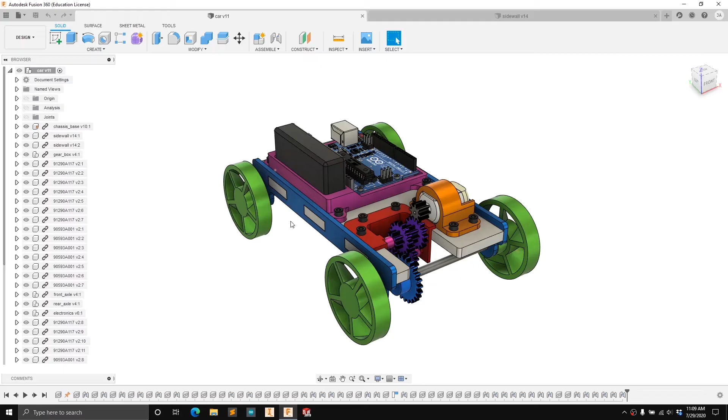In the last video, you should have set up your car project and imported all of the additional components. In this video, we're going to make the first of the components necessary for this assignment, which is the sidewall part. The sidewall is a laser cut component made out of 1/8 inch acrylic. The purpose of the part is to hold on the front and rear axle onto the chassis base. That is done using a friction fit between the tabs on the chassis, which fit into the holes on the sidewall.

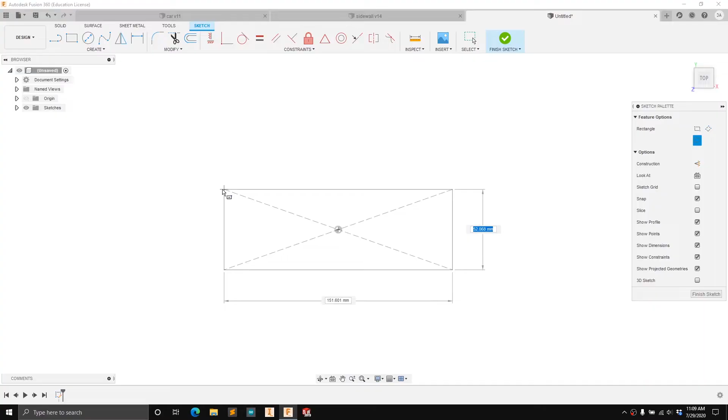To start, go ahead and click New Design to open up a new window. Then with all our parts, we're going to start with a sketch. We're going to put the sketch on the top plane, and we're going to start with the center rectangle. To do that, hit Create, Rectangle, Center Rectangle. Left click once on the origin, drag out, click again to finish the rectangle.

Then we're going to dimension it using the dimension tool to be 14.6 millimeters tall by 160 millimeters long. Zoom in a little bit there.

Okay, now we're going to create the holes for the axles. These holes are going to be 5.4 millimeters in diameter, and that just gives a little bit of clearance because our axles are 5 millimeters in diameter. So 5.4 millimeters.

Instead of putting that dimension on both of these circles, we're going to use what's known as the equal constraint. The equal constraint basically makes sure that these two circles will always stay the same size. Click once on the dimensioned circle and then click again on the other one, and you can see this equal sign shows up. Now if I change this to be maybe 8 millimeters, both of them change. So we're going to change this back to 5.4 millimeters.

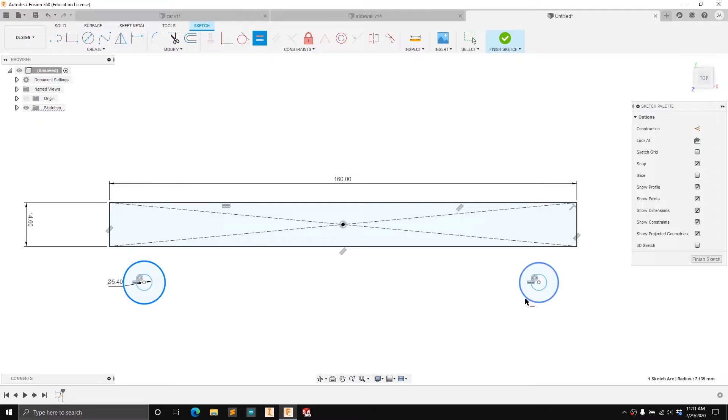Then we're going to draw another concentric circle around both of these parts, and we're going to put another equal constraint on these. Then we're going to dimension from the inner circle to the outer circle to be 5 millimeters, so that gives us a little bit of wall thickness there that we want.

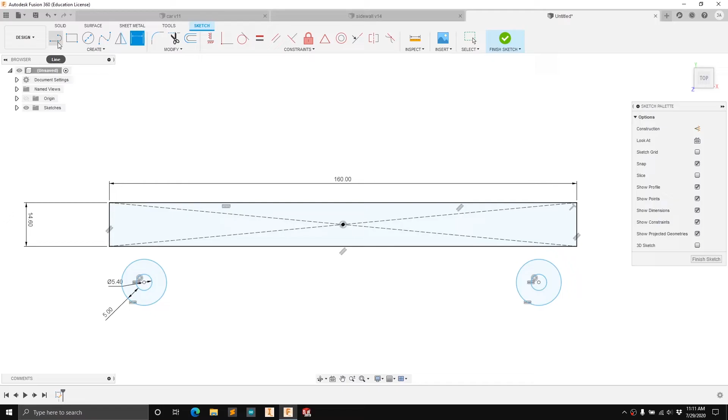Now we need to connect these outer circles to our main rectangle. We're going to do that with some vertical lines, so use the line tool here. Zoom in a little bit and make sure you see this X; that X means that you're on the outer circle. Then drag up and make sure you see this little box here, and that means that it's at a right angle, or that it's going to be perpendicular to the rectangle, which is what we want. So we want 2 of those. Doesn't matter where on the circle right now, we're going to fix that later. So you want 2 vertical lines like that.

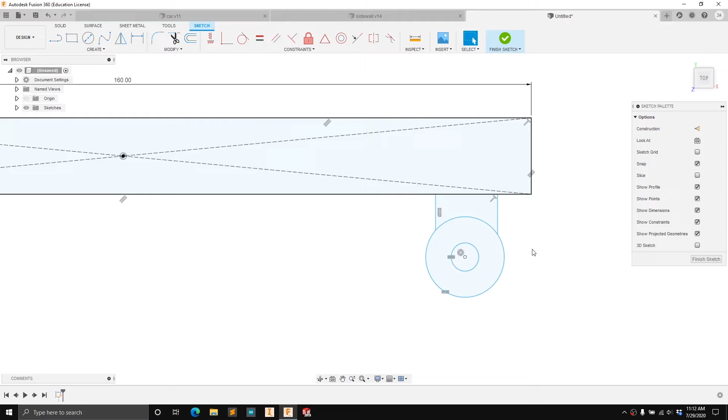If you didn't happen to make them vertical, that's okay. You just need them to be connected, and you could add a vertical constraint here like that, and that'll fix it. So there's a horizontal vertical constraint; it takes whatever it's closest to and makes it either horizontal or vertical. Same thing here, one more line. Now we want to make these lines tangent to our circles, so we're going to do that with the tangent constraint, which is right here. Click once on the line and once on the circle that it needs to be tangent to. Do that with all 4 of these lines.

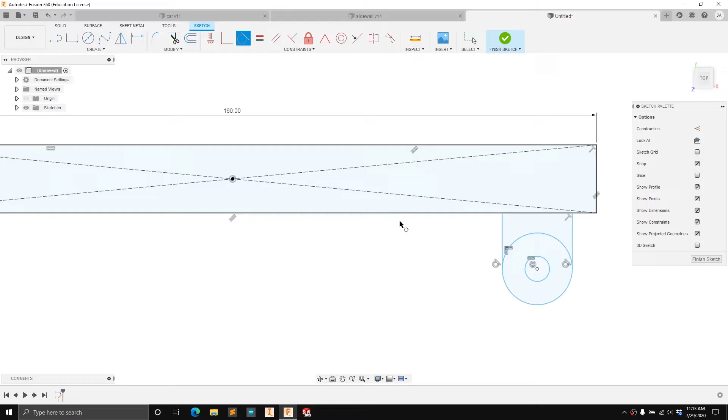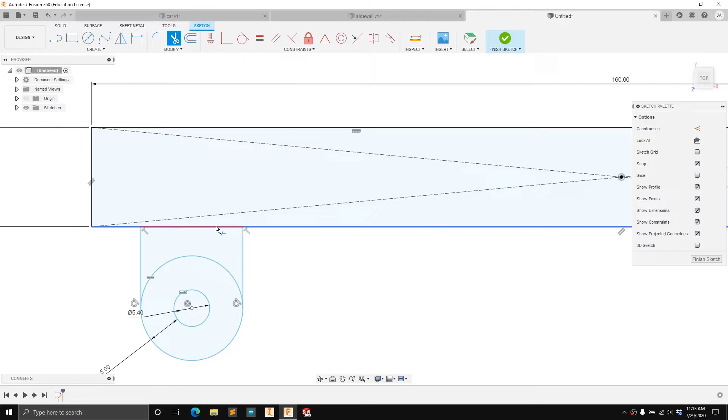So the last thing, or second to last thing we need to do is get rid of some of these extra lines. You can see here we don't have one clean profile; we've got kind of 5 different profiles that we don't need. To fix that, we're going to trim some of these lines using the little scissors tool here, known as trim. So you can remove that line and this line on both of these little cutouts.

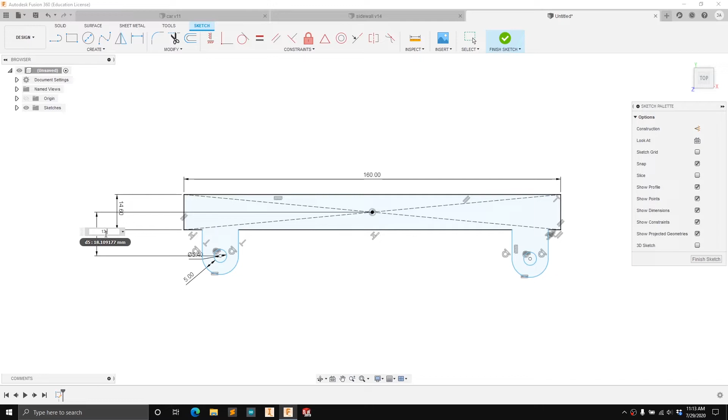Okay, so now we just need to dimension where these circles are. To do that, we're going to hit the dimension tool again, and dimension the center of this circle to be 13.825 millimeters down from the center of the rectangle. Then we're going to dimension the center of the circle from the left edge to be 14.5 millimeters.

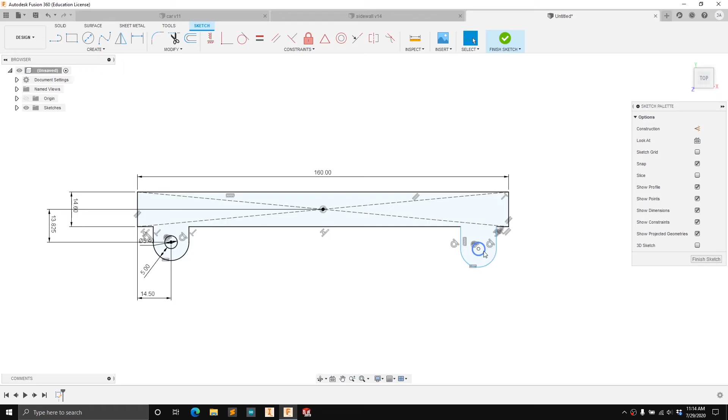You can see now these lines are all black, which means this one is fully constrained, but this one is not. The nice thing about our part is that it has symmetry, so in order to limit the number of dimensions and instead use that symmetry, we're going to add a symmetric constraint.

In order to add a symmetric constraint, we need a center line. We're going to create that by making a line and then hitting the construction button on the sketch palette. That'll make a line that's dotted, kind of like this one over here. That line cannot be used for geometries, it's just there for construction purposes. Make sure to hit the construction line again, or every other line, circle, or rectangle you make after will also be construction.

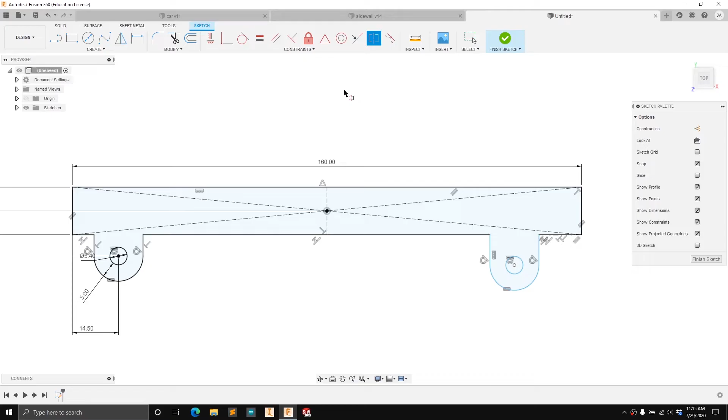Now we want to make the center point here symmetric with this center point using this line as our center line. So hit the symmetry constraint, hit the center here, hit the center here, and hit our line. You can see now it has a symmetric constraint and can no longer move.

So that's our first sketch, and we can go ahead and finish. Like I said, this part is made out of laser cut material, and the laser cut material we have in the labs is either acrylic or plywood. But either way, both of those materials are 1/8 inch in thickness, so that's what we need our part to be.

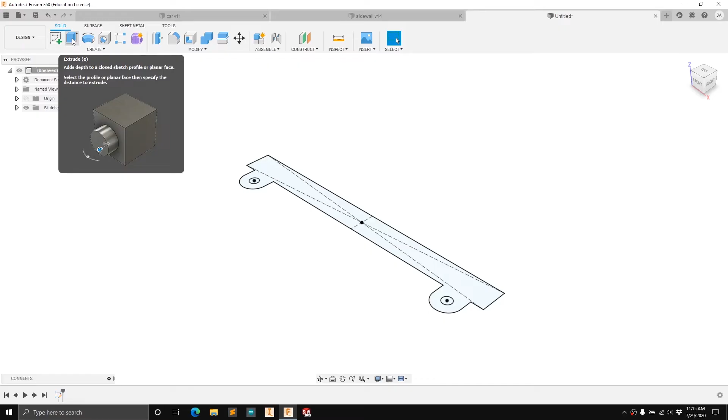So we're going to hit the extrude command, select our profile. You can actually, in this box here, type 0.125 inches, and it will automatically recognize that it's in inches, and you don't need to convert that to millimeters yourself.

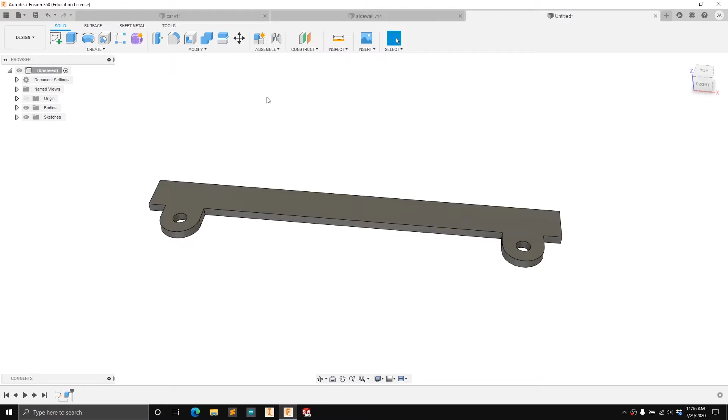All right, now we need to make the 3 rectangles that are going to slot onto our chassis base. So we start by making one rectangle here in the center, another sketch on top of that face, and do another center rectangle at the origin here.

And this one is going to be 24.4 millimeters by 6.6 millimeters.

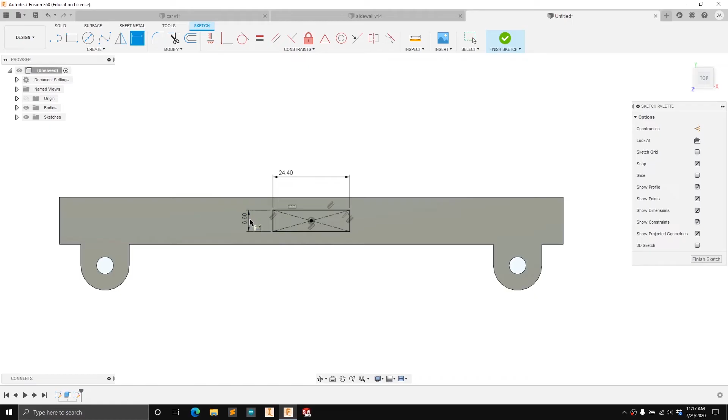The reasoning behind those dimensions is the MDF we're using is 1/4 inch material. We want a nice tight fit between the laser cut and the MDF, so 6.6 leaves just a little bit of clearance so it's still a nice tight friction fit. The tabs are made to be 24 millimeters apart in width, so the 0.4 millimeters gives a little bit extra clearance because that dimension is going to be kind of handmade, unlike the 6.6, which is just from the thickness of the material. So it gives us a little bit more wiggle room when we're making the handmade part, essentially.

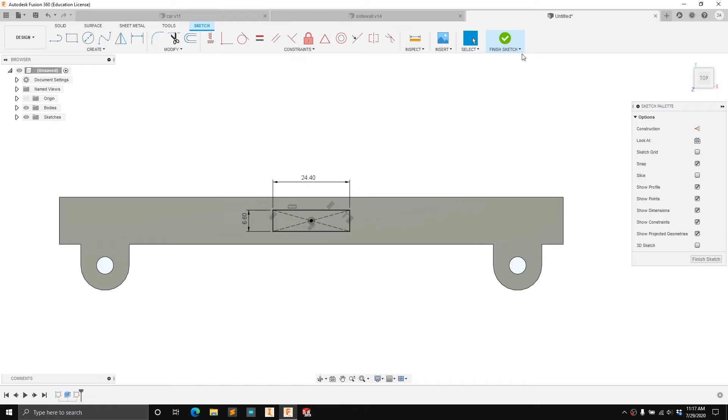All right, so we're going to finish the sketch now because all our lines are fully constrained. We're going to extrude again, but this time we want to cut this material away. So we select our profile, and instead of doing a distance, we're going to do a to object.

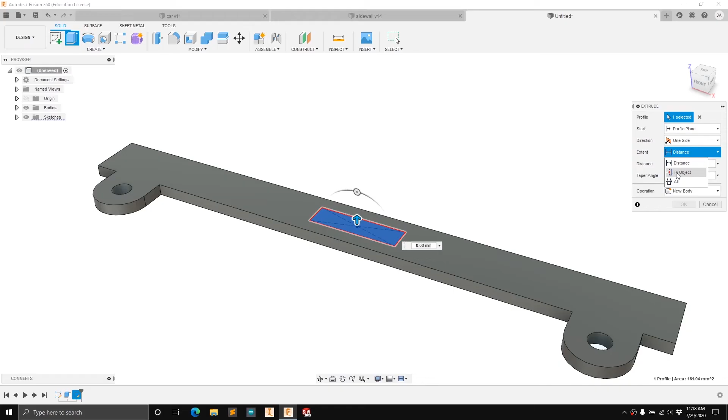In this case, we're going to select the object where the extrude is going to end, and in this case it's the bottom edge of this part, or bottom face. You can see here this automatically changes the operation from a joining operation to a cut operation, which is what we want. You see it shows up kind of red like this, that means you're removing material, which is good. That's what we want, so we're going to go ahead and press OK.

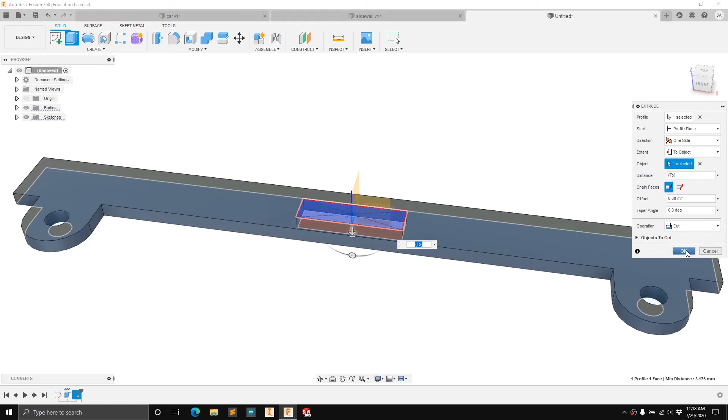Now you can see we've cut out a little rectangle in the center. So now we need 2 more of those spaced apart at a regular interval. The best way to do that is with a rectangular pattern.

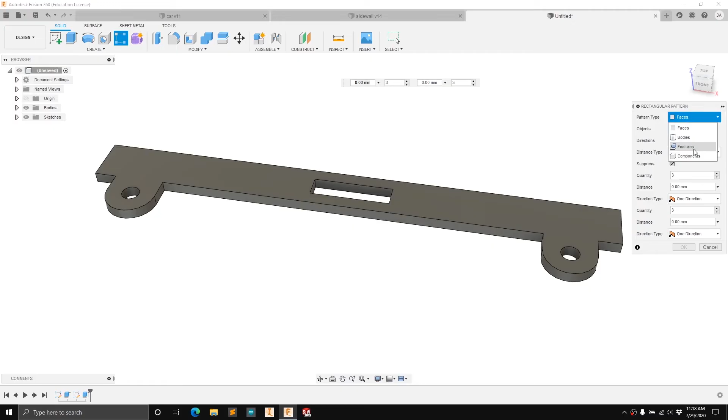So the pattern type that we're going to use is we don't want faces, we actually want to replicate that entire feature. So go ahead and press Features, and then from the timeline down here, you can select Extrude 2.

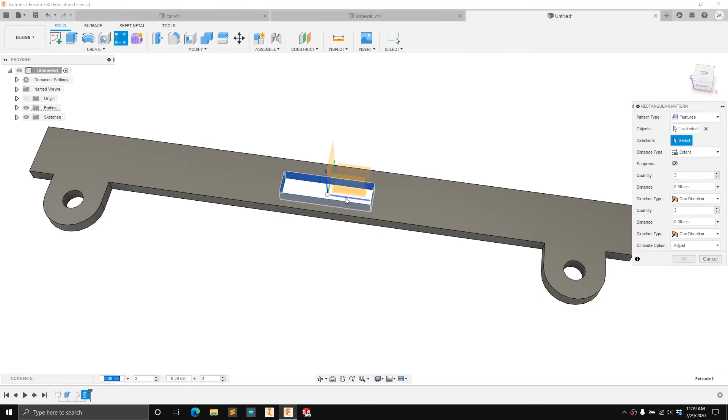So the next thing we need to know is the direction that we want. The direction can be done by selecting an edge. You could select an axis as well, like the x-axis here, but I just like to use the edge that's already on the part. And then we want to change from one direction to symmetric, because we want to go on both sides of this starting line here.

And the distance we want to use is, one second here, it's 46 millimeters. So we can select the distance over here on the right to be 46 millimeters. You can see it is spaced apart correctly.

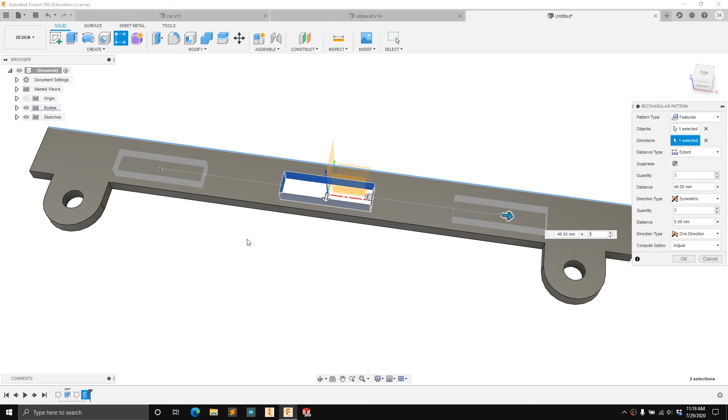So the way a rectangular pattern works is it actually patterns in two directions. You can see here if I change the distance, it's actually patterning more than we need. So we're going to just change the quantity down here to 1. That just removes any extra patterns in the second direction, because we only want the pattern in the first direction. You can change the distance here as well to be 0, but it doesn't really matter at this point.

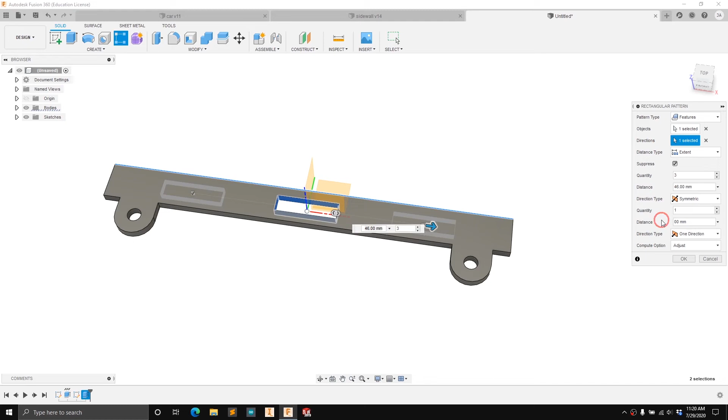Okay, so hit OK, and you should see the cutouts on both sides of the original cutout. And this is functionally our part complete, but we're just going to add one more feature that just makes the part a little bit nicer to hold and look at, and that's going to be the Fillet Tool, also known as a roundover in other software.

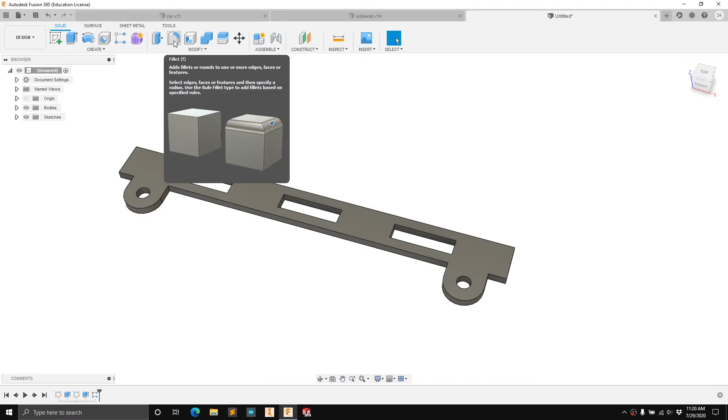So to do that, hit the fillet, and then we're just going to select all the edges we want. So it's going to be these interior edges here on both sides of the axle, and then the four corners of our original rectangle.

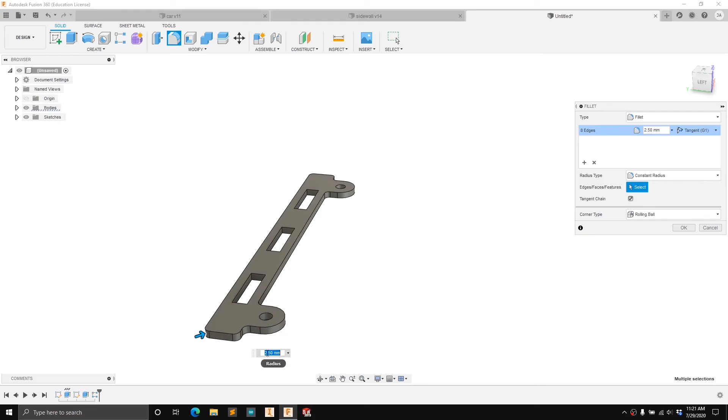And you can use this drag handle here, and we're going to change it to 3 millimeters. There we go.

So this is our part complete, and there's just one more thing I want to do, and that is to add an appearance.

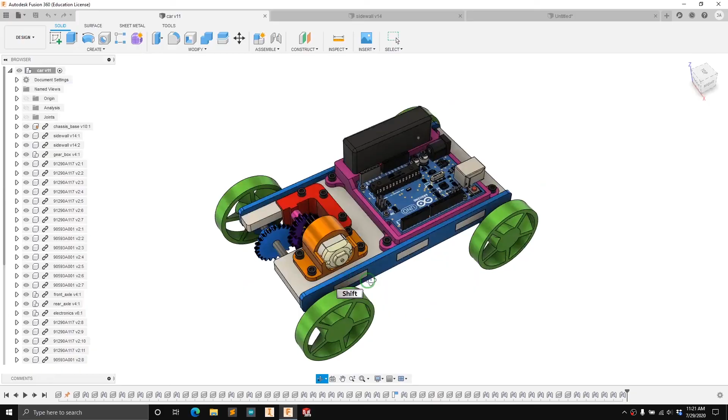For most parts this doesn't really matter, but I find when I'm working with larger assemblies like this car, it's really nice to have all the parts be different colors, and that just makes it easier to look at and see which part is which, and it makes the assembly a little bit easier to work with.

So I'm just going to show you how to do that. I made the part blue before, so we'll do the same here. To add an appearance, we're going to go into Modify and scroll down here to Appearance. So there's two kind of things that make an appearance: it's the material property that you're giving, and then the color.

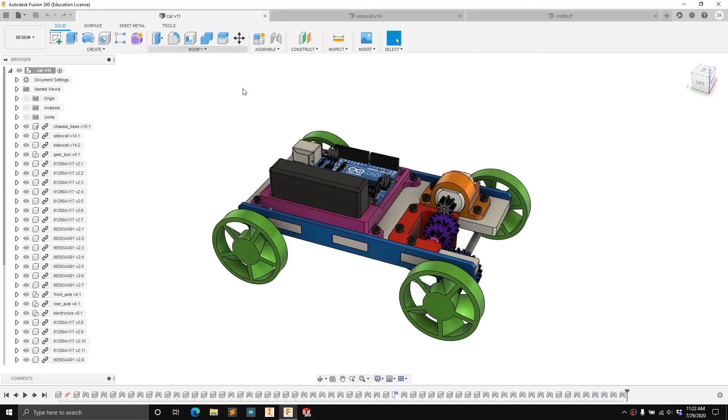So what we could do is, since this part is going to be plastic, we could give it a realistic material, like a translucent plastic. But I find that just kind of looks weird when you're working with the normal assembly. What you want to use those type of appearances for is when you're doing a realistic render. So I'm just going to give it this steel satin material, which is fine for now, and I'm going to edit it and change it to be a nice blue.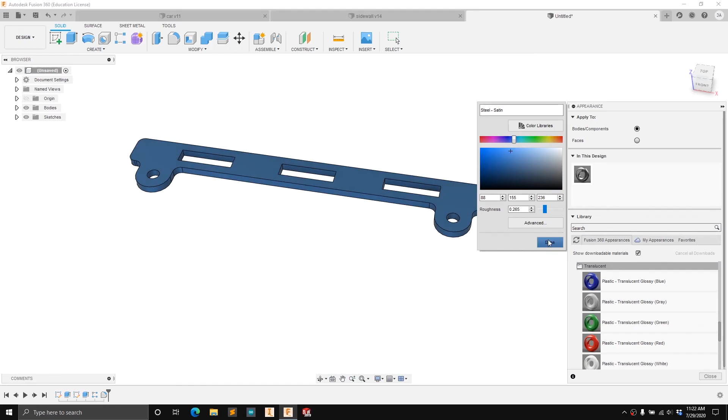You can move that scroll wheel around, just make a nice color, and there we go. Now it's a nice blue color that will stick out and will have a nice contrast to the other parts in the assembly.

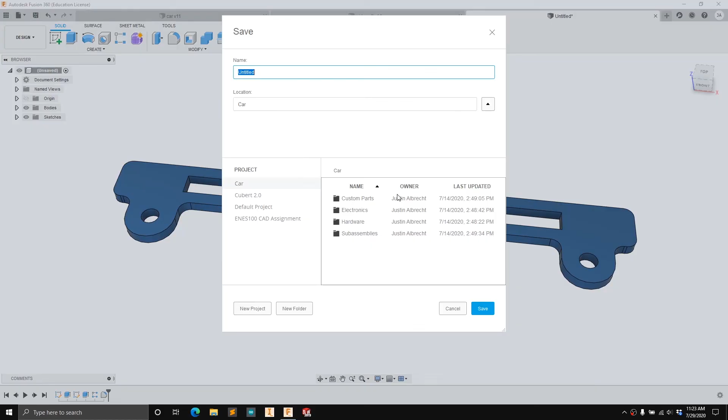Okay, so that's the sidewall part complete. The last step is just to save it. So press save, and you want to locate it in your car project under the custom parts, and we're going to call it the sidewall. And there you go, sidewall version 1 is complete.

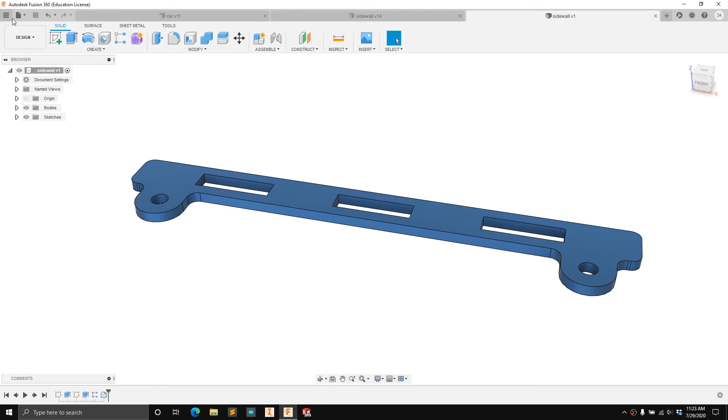And like I showed you before, anytime you made any changes, say you wanted to change the spacing here or change any of the clearances to any of the parts, you could save it and have a different version. And you can go into your data panel here, and you can select which version you want to use.